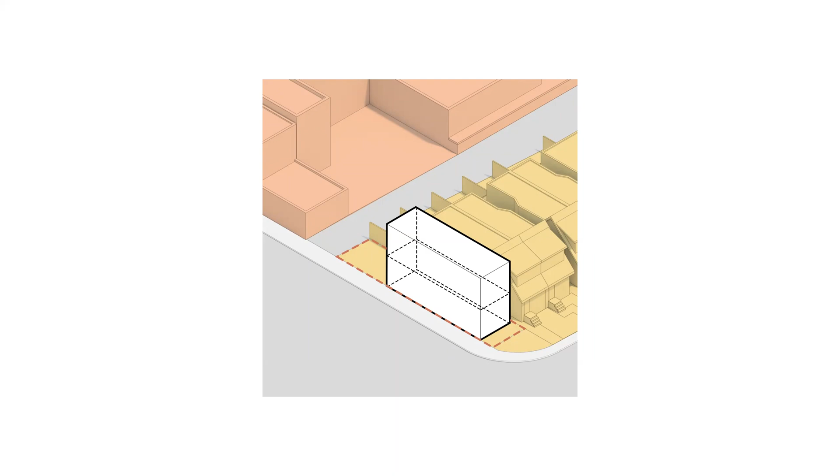By dividing the building vertically, we would be able to create units of the same size, but also with a similar quality of space. Semi-detached houses are also one of the prevailing building types in the neighborhood, so it fit the context well. Although in this case, both semis would be on one lot.

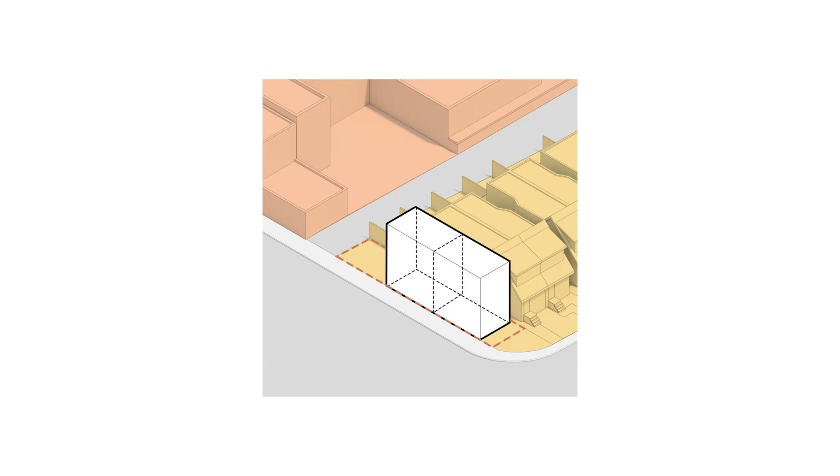And to take this even further, we broke the massing up into 3 smaller volumes to maintain the rhythm of 14 to 17 foot wide lots that line the street.

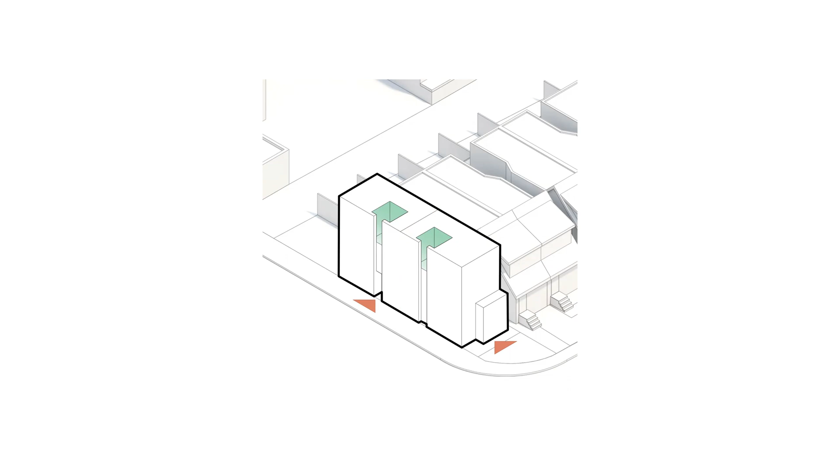Courtyards were then carved out of the second floor, bringing natural light into the bedroom area and allowing for some outdoor space. The courtyards help give a sense of seclusion despite the busy location.

We then looked at ways to screen the courtyards and backyard area with opaque and semi-transparent cladding elements that are integral to the architecture.

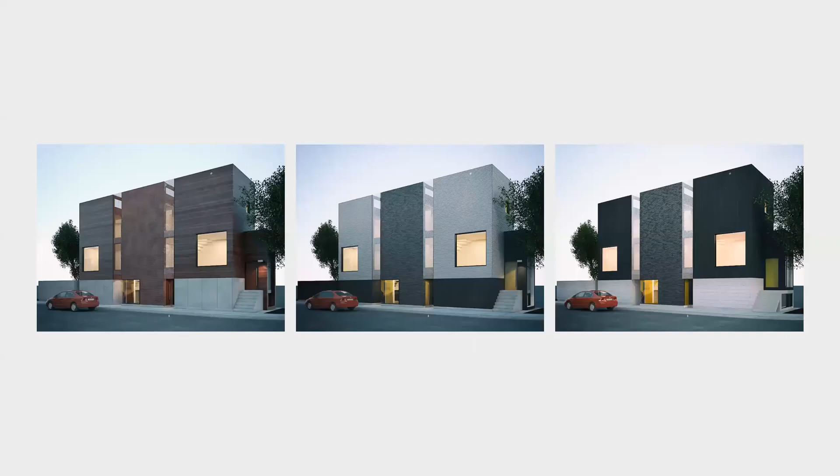Varied materials and material combinations were explored, including corrugated metal, which didn't seem right in this context, and masonry, which was avoided to maximize the interior dimensions.

One concern we had, given the location, was graffiti. The material at grade had to be something that could be easily cleaned or painted, and ideally a product that we could install ourselves.

We ultimately arrived at this scheme and applied for the necessary approvals. The final material selections were white stucco, gray fiber cement panels, and black painted wood siding for the base.

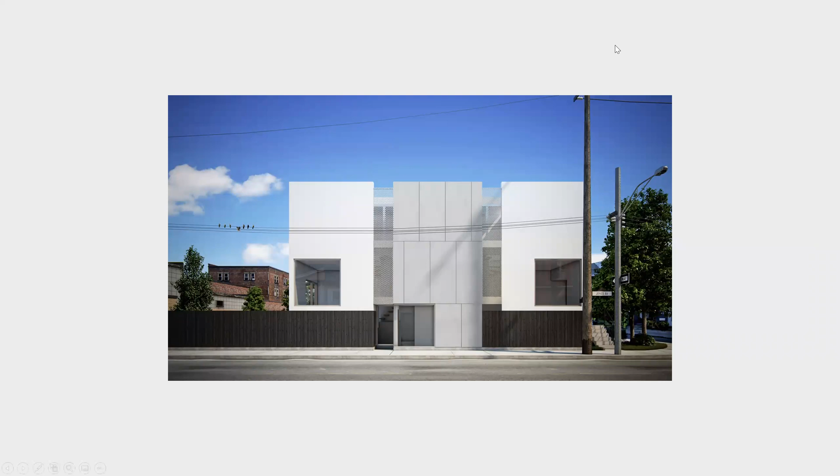It all seems logical and straightforward to us now, but one of the biggest challenges was figuring out when to stop. Without any outside deadlines, it was revision after revision. Thankfully, the small footprint and many site constraints were somewhat limiting.

We're not going to get into dollar amounts, as with the increases to land and construction costs that we've seen over the last 5 to 10 years, they're not relevant anymore. The breakdown would likely look different in today's market, with the land cost taking up a greater percentage of the total.

To incorporate key elements like the courtyard, large wood windows, an open staircase, and fiber cement cladding, we needed to find savings in other areas.

For example, the structure is conventional wood framing with no steel beams or columns. The excavation depth was shallow to avoid the requirement for shoring. The floor plans are mirrored to maximize efficiency. Custom items and complicated details were kept to a minimum. We also self-contracted the construction and took on some of the work ourselves.

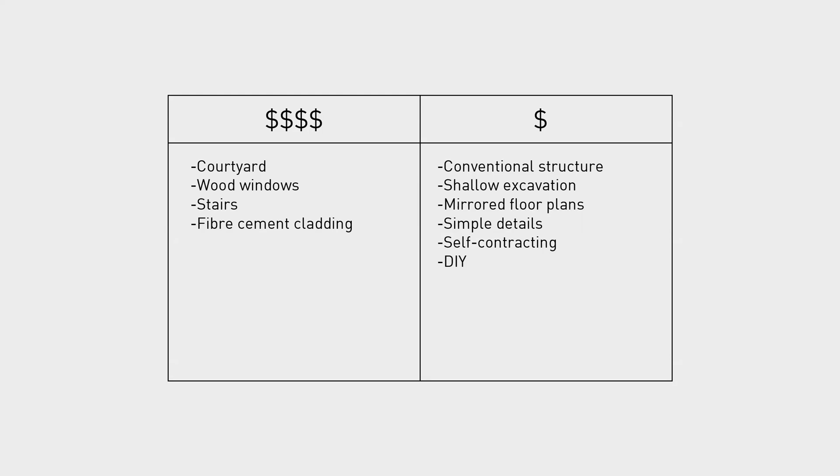Construction went smoothly for the most part, but there were definitely some bumps along the way. 22 helical piles were installed to address the poor soil conditions. The foundations went in, framing was underway, and then our first problem.

A building inspector from the city on site for review pointed out a clause in the plumbing section of the building code that we were not aware of. Our intention was for the servicing to work just like a typical multifamily property: one water and sewer connection from the street, split internally to each unit. But according to this clause, no plumbing serving a dwelling unit shall be installed in or under another unit of the building. This arrangement is only allowed when the units are stacked.

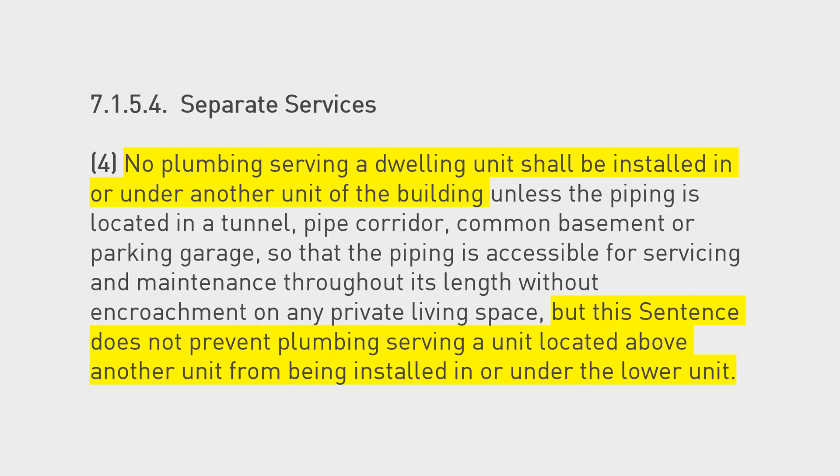There wasn't enough room to split the services outside of the building, so the only option was to have a second set of services installed for the north semi. But that created another problem: the city will only install one water and sewer connection per property. So for this to be fixed, the property would need to be severed in two.

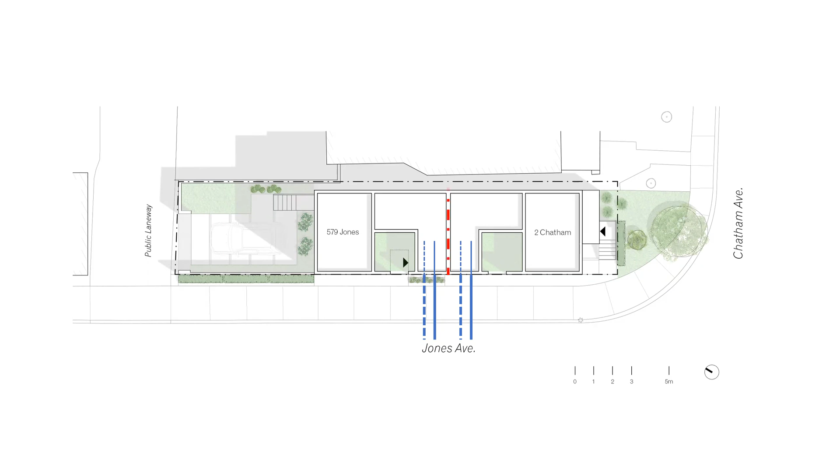So just as framing was underway, we applied to the Committee of Adjustment again, this time for consent, with a letter from Toronto Water in hand. The committee members had enthusiastically approved the project at the first hearing, and since this was just a technicality with no change at all to the built form, it seemed like a slam dunk.

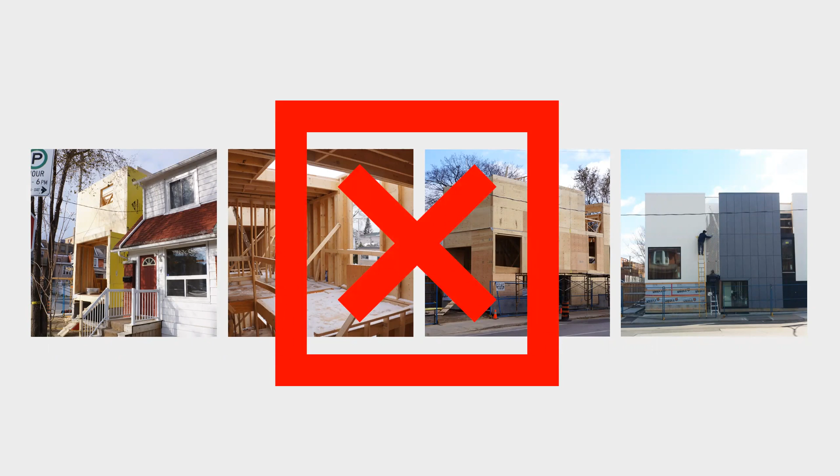But as I'm sure many of you know, the committee can be unpredictable. The new members were not as enthusiastic about the project and denied the severance. At this point, our best option was to appeal the decision and go to the OMB. At the OMB hearing, our evidence was uncontested and the legal severance was approved. We were finally able to receive the additional water and sewer connections.

As construction progressed, we focused on getting the rental suite completed and occupied first, then finishing ours and moving in. And we've lived here for about 6 years now.

Living close to the Danforth at the edge of Toronto's Greek town certainly has its advantages. We have lots of shops, restaurants, and other amenities accessible by foot or bike. The nearest subway station is a 6-minute walk away from our place, so it's very quick and convenient to get around the city. It's a really nice, lively neighborhood full of activity, especially in the summer and during the Taste of Danforth festival. Less so in middle February when these videos were taken.

We were very conscious of the building height and wanted to ensure that the overall form would not seem imposing to those walking on the sidewalk. The height is almost 2 meters lower than what is allowed as of right. And as you can see, the neighborhood is a mix of detached and semi-detached houses.

Symmetrical white stucco masses are a subtle way of referencing the semi-detached building type. The base is black wood siding layered with landscaping in front to help soften the edge. The center volume is the only area clad with gray fiber cement panels to help reinforce the symmetry of the two ends and work within the fine-grained fabric of the neighborhood.

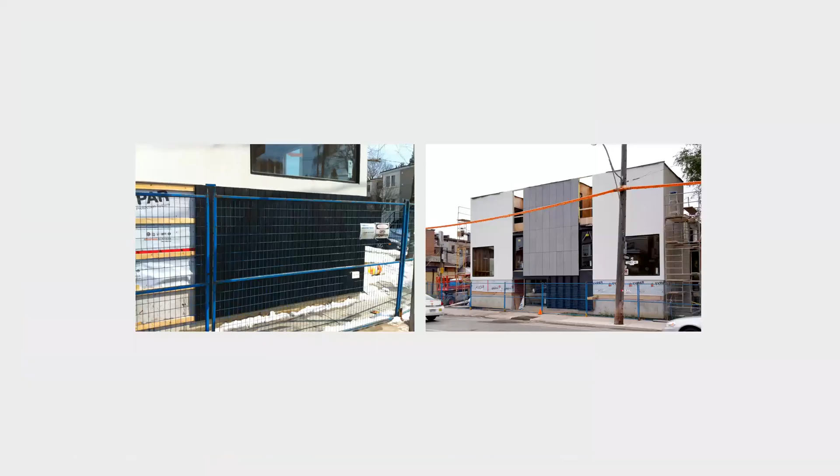The black wood siding and fiber cement panels were installed by Peter with some help from his father. The installation of the siding was straightforward, with the siding being right at grade and each plank the same length. For the fiber cement installation, we rented a scissor lift and the panels were kept to a manageable size. Each of these took about a week to complete and helped to save us about $10,000.

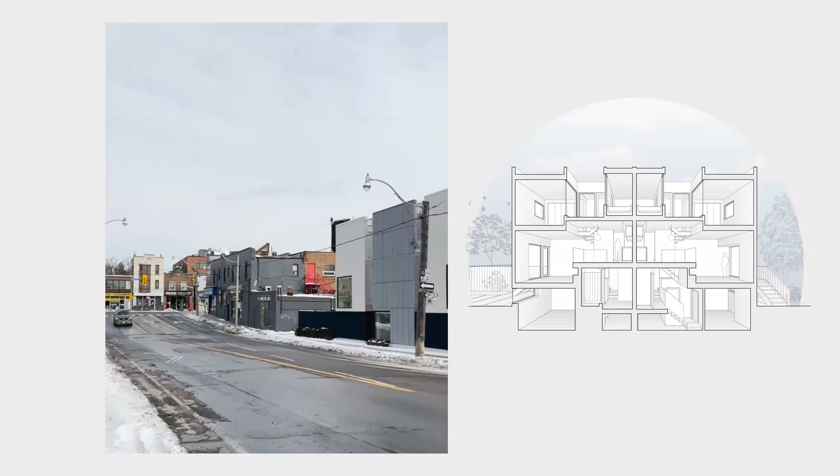The entrance to each home was given a lot of consideration. Although they have mirrored floor plans, we wanted to address the corner condition and acknowledge each frontage with a private entrance. The separation also helps create a sense of autonomy between the two.

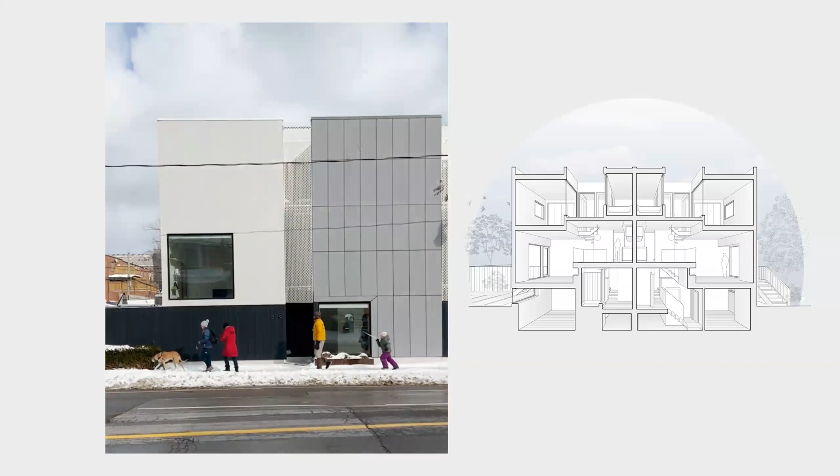Semi-semi is organized in a split level configuration. This allowed us to raise the living spaces to be out of view of people walking by, providing much needed privacy being located on a busy street. To ensure acoustic separation between the homes, living spaces are located at either end with service spaces stacked adjacent to the central party wall.

Peter and I live in the north semi, which is entered from an alcove off the sidewalk into a mid-level foyer. Privacy wasn't a concern here, so we have a large welcoming window. Our dog loves this spot. It gets lots of sun and it is great for people and dog watching, which he enjoys doing too much.

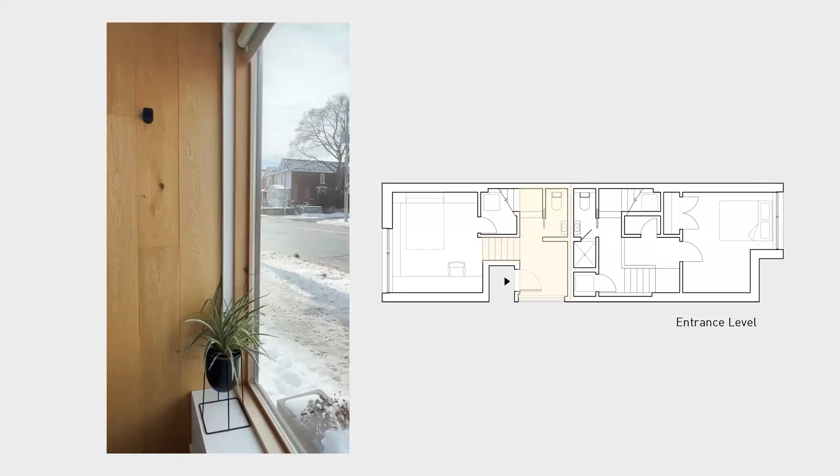So entering the foyer, to save space, we didn't include a closet. We have hooks instead on a wood-clad wall. On this same level, there is a small powder room tucked away from the living and dining spaces.

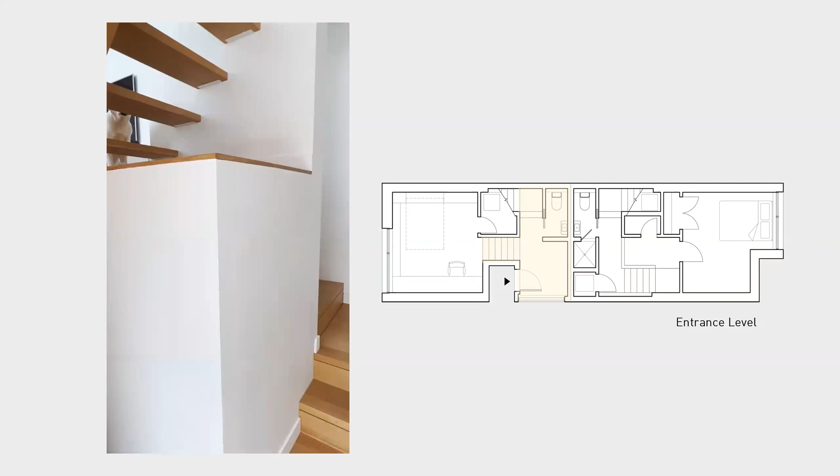The mirror in the powder room extends wall to wall to give the illusion of more space. Half a level down from here is our ultimate multi-purpose room.

A room about 10 by 12 functions as our laundry room, gym, guest bedroom, and office. Before COVID, it served as our home office, but now that we work from home full-time, we needed more storage and had to change the layout slightly.

The main living space is half a level up from the foyer. The transition to the living room was intentionally compressed to emphasize the height and openness when you arrive. The large west and north facing windows bring a ton of direct and diffuse natural light.

Each function-specific level bleeds into the next as each space is experienced in sequence. We think this helps the space feel much larger than it is. From the living room, there is also access to the backyard and parking.

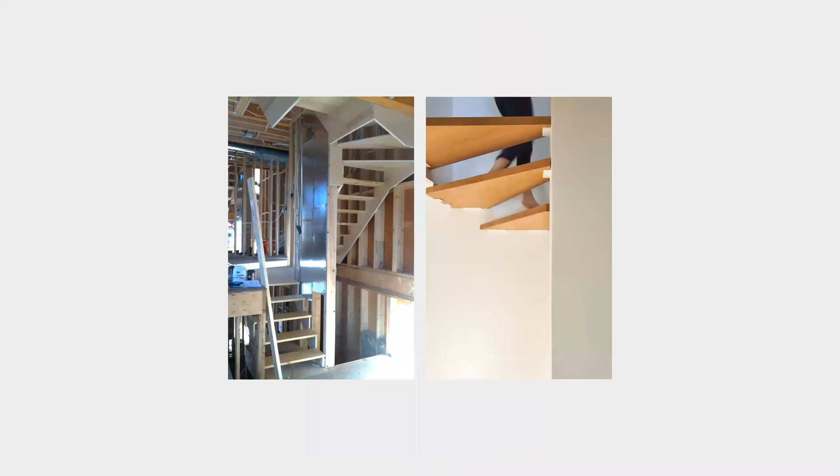In the end, temporary stairs were built to serve as both construction stairs and as a template to install each bracket in its correct location.

Continuing up the stairs from the kitchen, the main bedroom level is next. As you reach the top of the stair, you are greeted by a courtyard space.

The bedroom is sized to have enough room for a queen-size bed, two nightstands, a dressing area, and a semi-built-in wardrobe. We wanted a built-in look for the closets, but didn't have the budget for custom work, so we had a wall framed with an opening matching the size of IKEA wardrobes.

The bedroom looks out into the courtyard, which is our favorite part of the house. It brings so much natural light into this level without sacrificing our privacy at all. We're able to leave the blinds always open and have that connection to the outside, unless we need to sleep in.

So up another few risers is a door to the courtyard and our main bathroom. The perforated aluminum screen we saw below extends up to act as a guard for the courtyard.

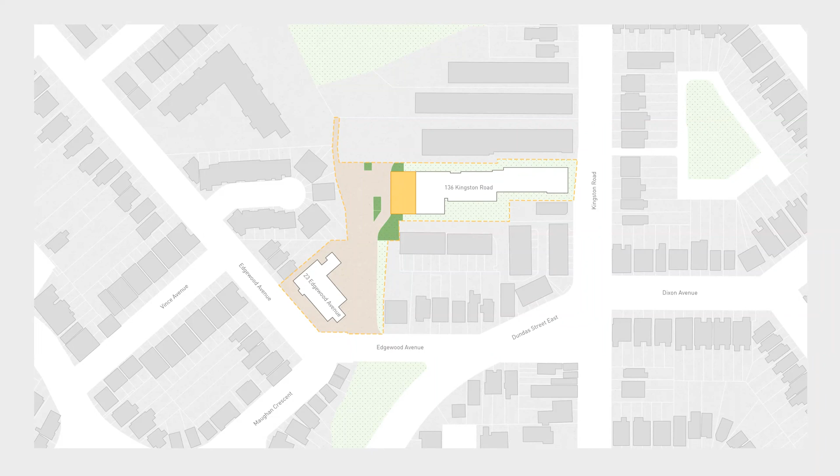They currently operate 2 apartment buildings in Toronto's East End with a total of 117 units. The 2 buildings are situated on an irregular shaped property fronting 2 streets, Kingston Road and Edgewood Avenue, with ample parking in between. The organization was successful in receiving a grant from City of Toronto's Open Door Affordable Rental Housing Program, and we were asked to design an extension to the larger apartment building, 136 Kingston Road.

The existing building is 3 stories with a basement that has a walkout at the rear. It's a very long brick building consisting of bachelor, 1 and 2 bedroom units with good sized windows for living and bedroom areas.

The parking lot is underutilized with less than half of the spaces occupied. By repurposing some of this area to extend the building, it would be possible to add a significant number of new rent-geared-to-income apartments with minimal impacts to the building's surroundings or its current residents.

The surrounding neighborhood consists of mostly single-family homes and low-rise apartment buildings. To work within this context, we use the existing building height and setbacks as our guide. Although the apartment building is long, its comparatively narrow street frontage hides the full scale of the building well from the sidewalk. The new addition will be almost invisible from the public realm.

By taking advantage of the topography at the rear, we were able to add a new lower floor level with additional suites and common area. It also helped us to create a more engaging entrance connected to a new landscaped amenity area.

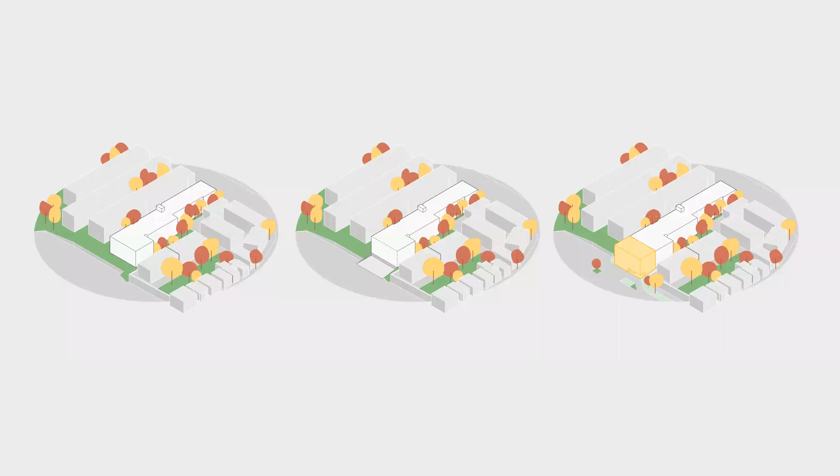Another important aspect of the project is accessibility. The building does not currently have an elevator or barrier-free entrance. Both of these will be included in the new addition.

Also, of the 28 new and 8 renovated suites, 25% will be barrier-free. The suites are a mix of 1 and 2 bedroom layouts.

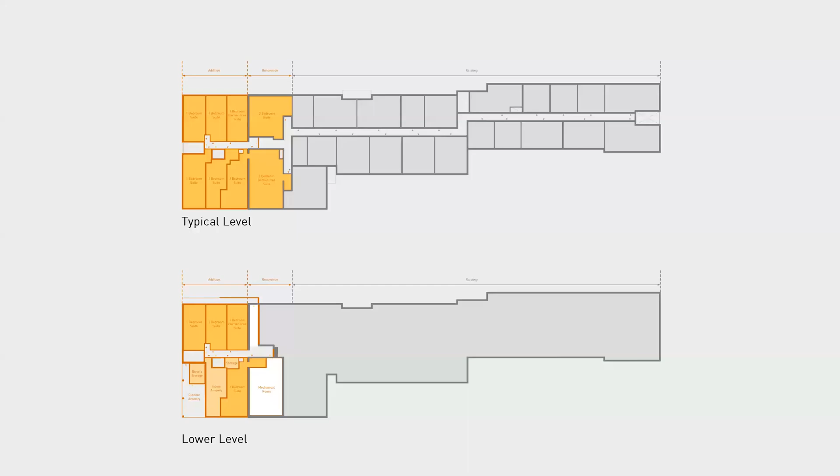The design of the extension takes cues from the existing 1950s building with a restrained material palette and modernist details. The project is currently awaiting building permit issuance and construction is scheduled to start next month.

Working through approvals with the backing of the Open Door Affordable Housing Program has been a really positive experience. There's been a real sense of urgency from city staff, a noticeable difference from most of our other projects.

And lastly, this is a recent project, so we're still in the very early stages. We were approached by the client to complete a feasibility study for this site.

The existing building is a 2-story, 9-unit apartment building. It's in a wonderful downtown location, right across from the AGO and beautiful Grange Park. The neighborhood is comprised of mostly single-family houses, small apartment buildings, and many historical homes on Beverley Street.

In a central location like this, adding density should be encouraged. However, it is in a yellow belt with residential zoning. The existing apartment building fits nicely into this context. So we looked at how we could add density, but retain the building and its residents.

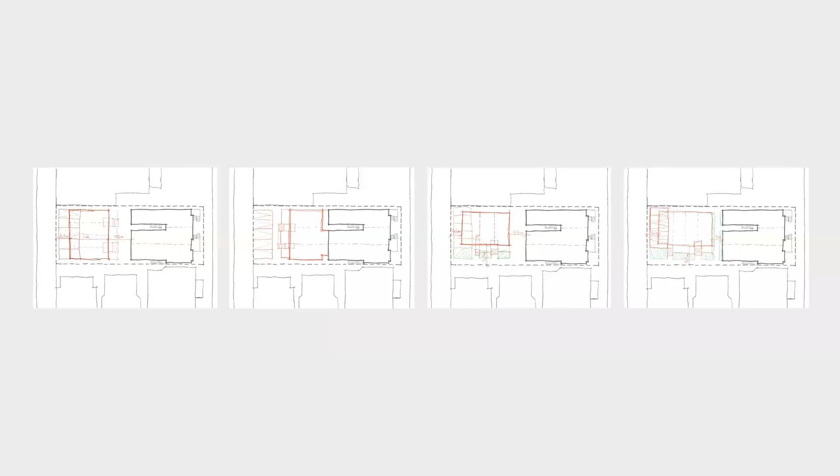During the preliminary sketches, one of the options we looked at was a rear addition, but making the connection would have required too many changes to the existing building.

We ultimately arrived at a scheme that includes a new rooftop addition to the existing building that's set back from the front facade, as well as a new stacked townhouse building at the rear.

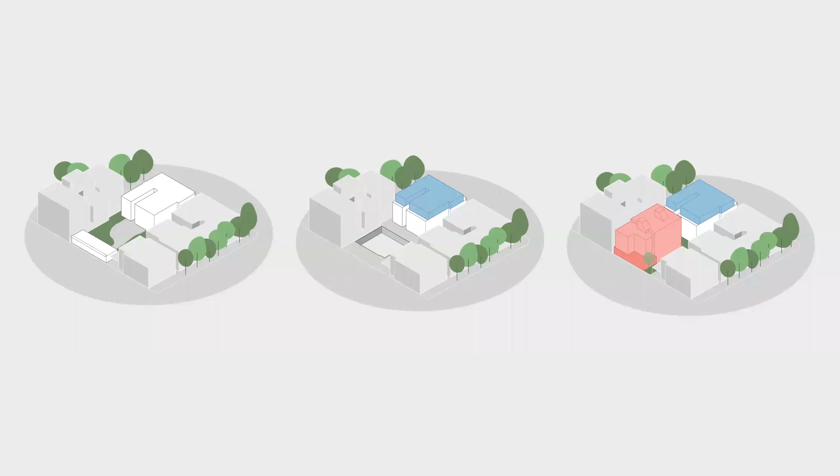The new units are oriented to the south with a landscape path to each private entrance from the generous 5.5-meter setback. Configuring the form this way really opens things up to the laneway, so when approached, it appears more inviting. It also helps bring natural light into the suites.

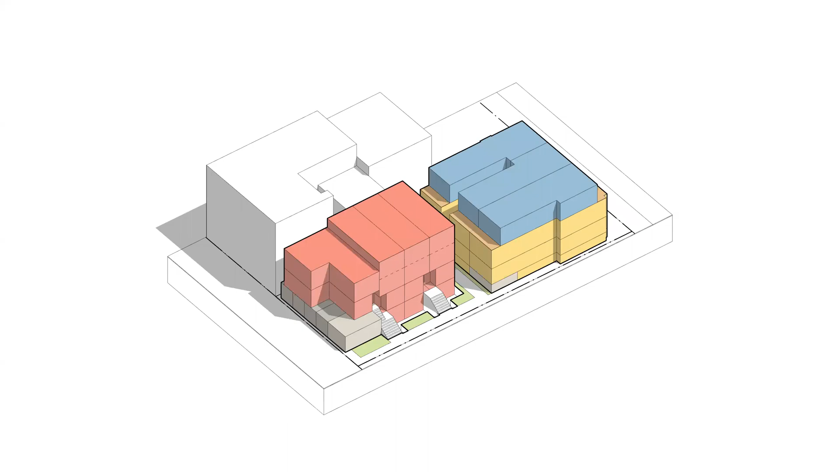In total, we are able to add 14 new rental suites with this scheme in a manner that would have little impact on the existing building, its residents, and its neighbors. We're currently preparing planning application for this project.

The current planning policies have directed intensification efforts towards high-rise apartments and condominiums, while limiting potential for additional ground-related housing within existing neighborhoods. But it seems like that is finally starting to change. Toronto introduced its Laneway and Garden Suite program, and recently, Ontario's Housing Task Force released a draft report calling for dramatic changes to current law, including an end to single-family zoning.

As cities continue to grow, the intensification of urban areas is inevitable. Toronto is facing a housing shortage, and affordability is deteriorating. Without question, we need to increase our supply of housing and the rate at which it's being built. The projects we've shown are certainly not a cure for this, but they are examples of how modest intensification can be introduced in a gentle, contextually sensitive, and non-destructive manner.